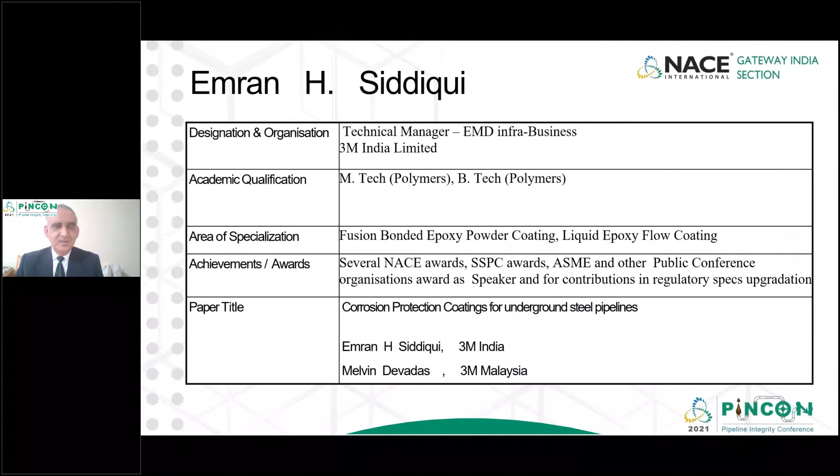Now, what is important about corrosion protection? The corrosion protection coating has been used for maybe the last 70, 80 years, and there have been lots of oil and gas pipelines which are still functioning, and the industry has been working on this. But there are changes now. There are new developments, improved technologies are coming into place, and the methods of application have improved. So we will be discussing the important part, the new changes and positive improvements in coating technology.

As part of this discussion, we will talk about the different types of coating technology, the application processes, what controls can be made and improved, and in what environment the pipelines have to be constructed and operated.

We will also discuss that in case there is an error in application or a dilution of discipline, how it impacts the long-term performance of the coating and the long-term service of the pipeline.

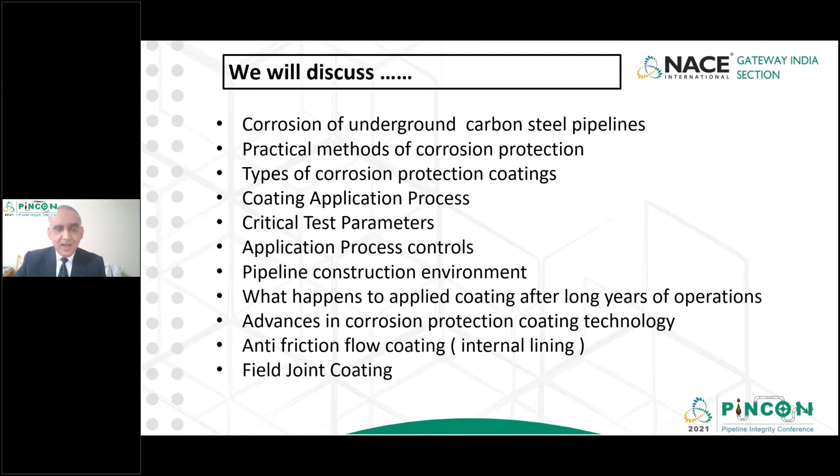So all of us know that fusion bond epoxy coating is the important part of corrosion protection technology for underground pipelines. This technology was invented about 60 years ago, and since then it has been in use.

So we will be discussing the quality assurance part of the application process. The company which invented the FBE has also played a good role in developing a good quality assurance system for the application process.

It also worked with regulatory industries like the Canadian Standard Association and International Standards Organization to have a comprehensive system of testing, qualification, sampling plan, method of evaluation, and the decision making process in terms of acceptance criteria. So we'll be talking about that.

The very important part of this coating is that we need to know how this application process impacts the long-term service life under varieties of service conditions. Other than line pipe coating, there are components of pipe construction which is field joint coating, though we'll be touching on that also.

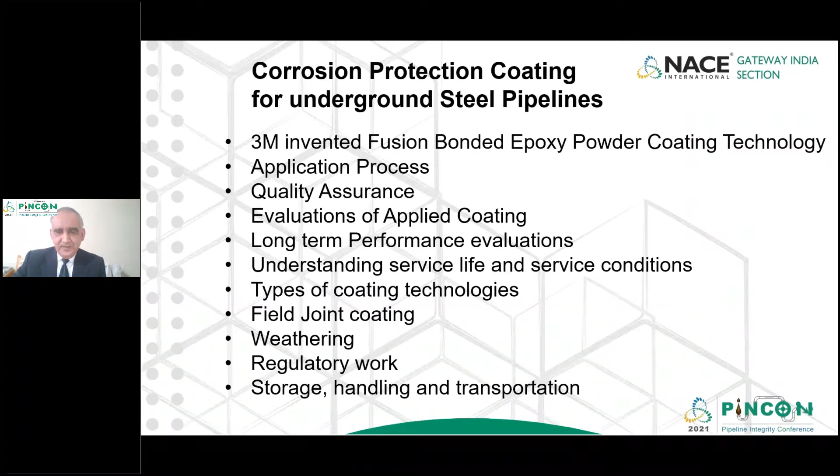Now, what is fusion bond epoxy coating? It's physically a powder which is largely based on epoxy resin, and it is created in a way that there are so many components in the physical FBE powder.

One of the main raw materials is a specially chosen epoxy resin in the solid form, and of course the manufacturers know the characteristics of the resin which has to be used. So it's not a general purpose resin, it's very specifically developed for this purpose.

The second most important composition is the catalyst part of it. It's again a chemical which actually reacts with the epoxy resin. The catalyst can be amine based, or different kinds of materials are used as catalyst, imidazole, etc.

Then there is a curing agent. Now, why do we need two items like catalyst and curing agent? Because during the application process, there is a requirement that the powder should form a gel within a certain period of time, a few seconds, at a certain temperature. So there is a component called catalyst which controls the gel time of the powder, and there is another chemical which is a curing agent, which actually helps to completely cross-link the epoxy resin.

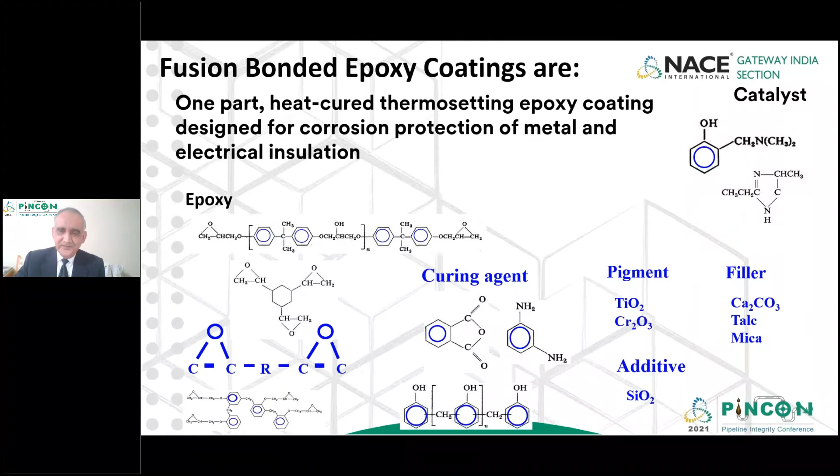When we come to Europe and Middle East, there is another trend here, that a three-layer polyethylene coating system is being applied. The three-layer polyethylene coating system was introduced after FBE was introduced. What was the reason for that? The fundamental thing is that pieces of pipe are coated in a factory, and then they are transported through a truck drive to the construction site.

During this truck drive, the pipes have a lot of bumpy rides, which causes the pipes to impact each other. And during handling, the pipes are taken through the powered crane.

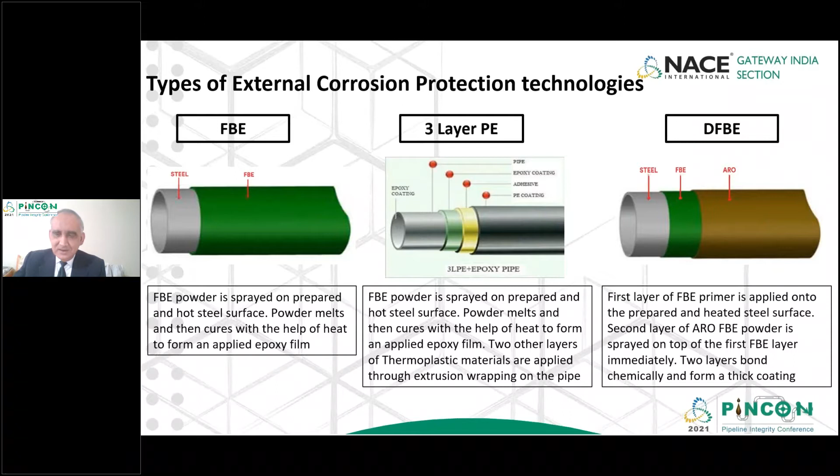Now, in order to apply any type of this coating material, an applicator needs a directional document which provides guidelines and helps the applicator stick to certain important points. That is a live document for the application process. This same document is with the applicator, the inspection agency, and the client, and it helps like a Bible to settle any dispute or ambiguity, or provide clarification on what to do in case deviations are noticed. So this is good practice.

What is needed is that in this documentation, any improvement in terms of how to improve the surface preparation, or how much improvement is needed in application speed or temperature, should all be mentioned in this document, which is called a contractual specification.

As a manufacturer or consultant to this industry, our team is continuously in contact with all stakeholders. We provide data and collect data through our network. There are several third-party research organizations continuously working on methodology improvement, so updated information is available to help improvise this document.

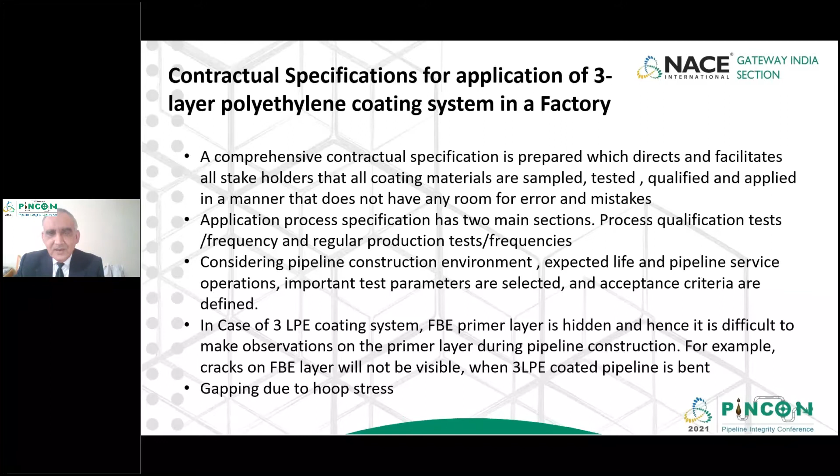Now, if we're talking of three-layer polyethylene coating, there are three most important parameters here. Why is it important? Because when these pipelines are constructed in the field, the pipeline has to be bent according to the topography or path of the line.

When it is three-layer coated, it's very difficult to find out what's happening with the FBE primer layer. So there is a new suggestion in the contractual spec that before we start the application process, we coat a few pipes only with single layer FBE and conduct additional tests to make sure the three-layer coated pipeline will always perform as expected. One of the most important parameters is the flexibility test for the single layer coated pipe.

Normally the ISO standard is referred to in most specifications, but in this case, ISO is a very easy specification to meet: 2 degrees per pipe diameter at 0 degrees Celsius. There is a need for a more stringent specification so there is assurance that this will not have any probability to crack or fail when the pipeline is constructed.

So our suggestion has been, with several companies, and some of them have adopted it, to make it 3 degrees per pipe diameter, tested at minus 30 degrees Celsius. This comes from a CSA specification. So there is already a regulatory spec available, and many companies have adopted it.

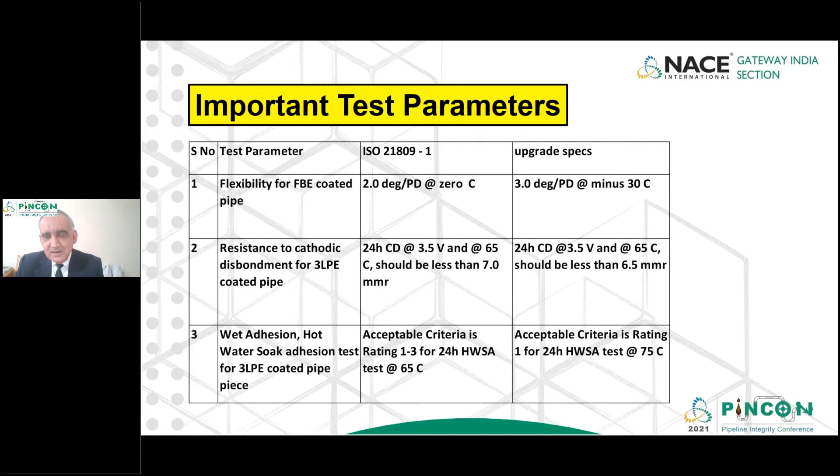So we generally test a 24-hour hot water soaking adhesion test at 65 degrees Celsius as per ISO. What we have suggested to improve it, many companies have taken reference from CSA, and now the new requirement is rating 1 as per CSA, with the hot water soak adhesion test done at 75 degrees Celsius. This is the immersion test. So if they take care of these parameters, all others will fall in place.

Now the question is, how do we ensure that every piece of pipe which is coated follows this? Because typically after procedure qualification test, it can take several weeks or months to complete the project, and applicators will run this coating process continuously for 3 shifts. So in order to ensure every pipe coated follows this, there are some guidelines.

First, select the FBE powder which has got a wider window, that it can take care of fluctuations in the conveyor speed or fluctuations in the pipe temperature. If the FBE powder doesn't have a wide window, and for any reason the temperature fluctuates, then the adhesion levels may vary. So that's very important.

Second, inspections for incoming pipe are also important, that the incoming pipe does not have any defect before the application process. Salt contamination has to be checked on a blast clean pipe, and it should be ensured that it is within the limit.

Otherwise, there is a recommendation to use a very high pressure water wash. Also, it should be cleaned using phosphoric acid so that all the salt gets combined with the acid, followed by a water wash. So the acid should also be removed. That is why there's a pressure requirement that at least 2000 psi of RO water is needed.

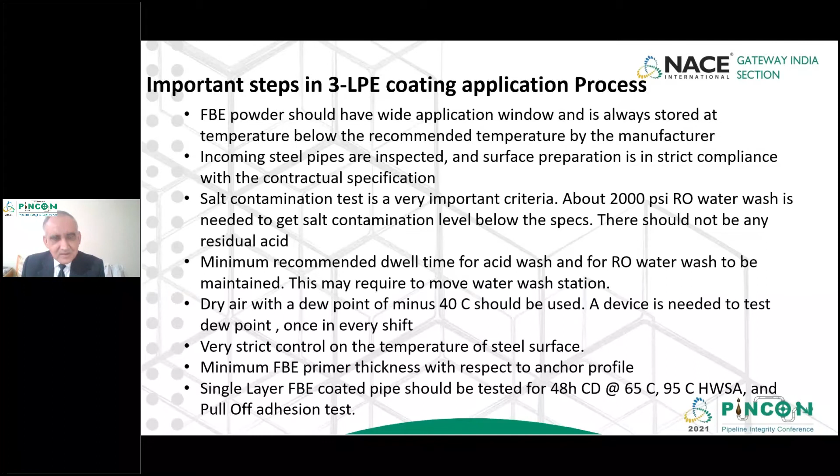Let's see how the flexibility test is done. We mentioned three parameters, and one of them is flexibility. As per the Canadian standard specification procedure, the FBE or DFBE coated pipe needs to be cut into panels of about 1 inch by 8 inches in size.

In the middle picture, you see a brown colored panel, which is actually a piece of pipe. Before it is bent, it is kept in a freezer at minus 30 degrees Celsius for at least 1 hour so that the temperature is stabilized. The panel is taken out, and a stopwatch is used to measure how much time it takes to bend.

There's a guideline on how quickly it has to be bent. The panel is placed in the bending machine against a mandrel, and the mandrel is designed for an angle of about 3 degrees per pipe diameter. The bending is done very quickly, and the details of speed and time are written in the specification.

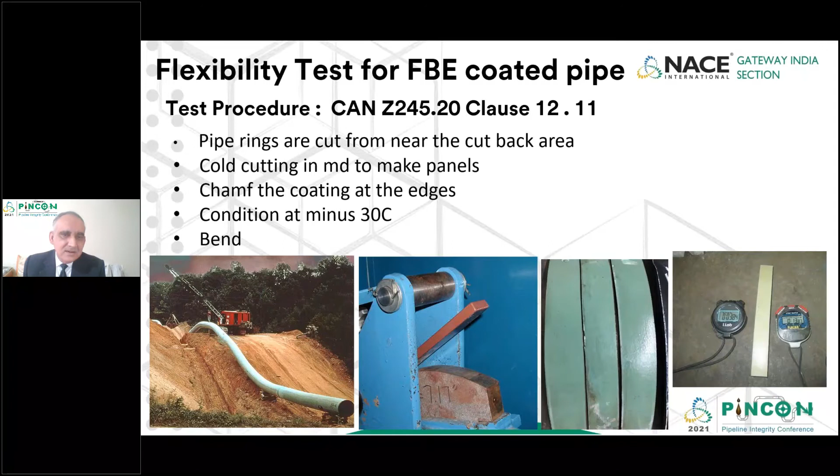After the panel is bent, it is kept on a table or platform, and for the next 60 minutes it is observed with a stopwatch to ensure it doesn't develop any cracks or pinholes. Then a small low voltage tester is run over the bent bars to check for discontinuity or holidays. That completes the flexibility test method.

The second parameter is resistance to cathodic disbondment, again a very important parameter for coating. In the picture, a piece of pipe is shown at the bottom, and a plastic or glass beaker is built on it using a sealant. There is an intentional holiday created, meaning a small incision or circle is intentionally cut using a knife.

The guideline says the holiday should be 3 millimeters in diameter. There is an electrolyte solution of 3% sodium chloride and water, and an electrode attached through the electrolyte, typically a calomel electrode. A 3.5 volt DC current is applied to the circuit, and the temperature of the assembly is kept at about 65 degrees Celsius, using either an oven or a sand bath with a heater.

This test has to continue for at least 48 hours. This is a very highly accelerated condition of corrosion compared to what happens in actual service conditions. After 48 hours, the beaker assembly is removed, and the panel is allowed to cool down to room temperature, and then a knife is used to remove the coating.

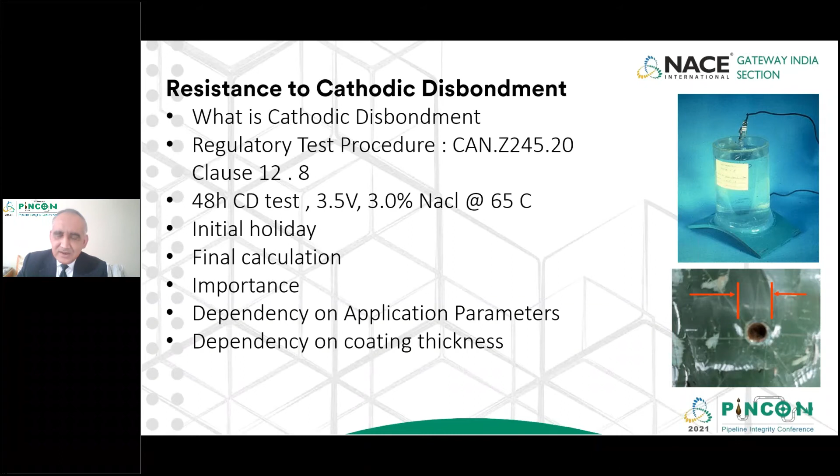Another third parameter is adhesion of the coating material. Because it's an epoxy, it bonds very high with the steel. It's called a structural adhesive.

There are two ways to test it. One is in the laboratory, shown in the brown picture A, which is the overlap shear strength test. If we do it that way, it will show more than 4000 psi, which is a measure of structural bonding. But shear adhesion cannot be done every day, since the panel has to be prepared, bonded, and cured. So it's like a one-time qualification testing.

What is more common, and can be done every day, is the pull-off adhesion test, shown in the green picture. The aluminum dolly is bonded onto the coated surface using a structural adhesive. After the adhesive is cured, equipment is used and the dolly is pulled. The value of pulling force can be measured either in psi or megapascal. Some equipment measures in psi, so anything above 4000 psi is good adhesion. Or if measured in megapascal, it should be at least 30 to 40 megapascal. That's a very, very high level of adhesion for an FBE.

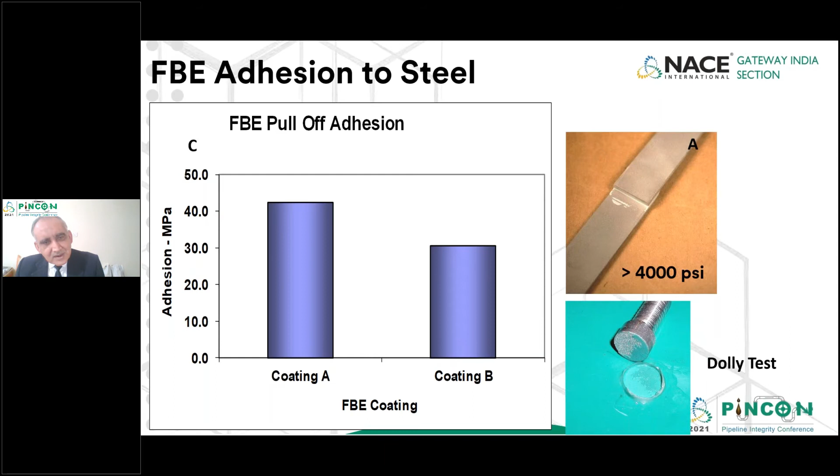So tender documents normally recommend that when a single layer pipe is coated, this pull-off adhesion test should be performed.

Now we are moving to a dual layer system. We discussed about 3 different options. In this diagram, the green color material is FBE primer for corrosion protection, and the outer layer is called abrasion resistant overcoat, or ARO FBE. Both are FBE. The outer layer material provides very high impact strength and high abrasion resistance.

It basically protects the FBE primer during handling and transportation, and this is a very rugged system. This combined coating system resists temperatures up to 110 degrees Celsius, so pipelines operating at say minus 30 to 100 degrees Celsius can utilize this technology.

It's very fast and easy to apply compared to 3-layer systems. This system can be applied with greater speed, so the pipeline project can complete on time. It's easy to handle, easy to inspect and repair coating defects. The total thickness required for corrosion protection in this case is only about 800 to 900 microns, compared to polyethylene which is 3 millimeters. So it consumes less quantity of coating material, making it more economical with higher performance.

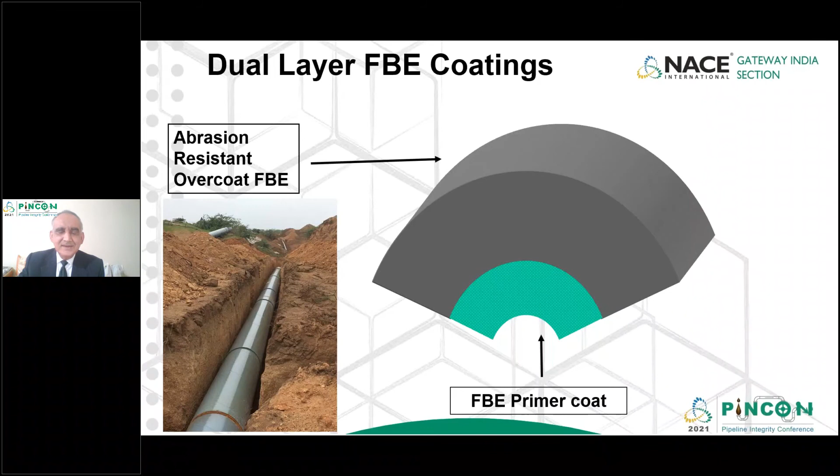In terms of application of dual layer, it's very simple. All of the applicators have got 2 booths. The first powder spray booth is for the primary layer, and the second booth, next to the first, is for ARO powder. So it's easy to apply and easy to recover the recycled powder.

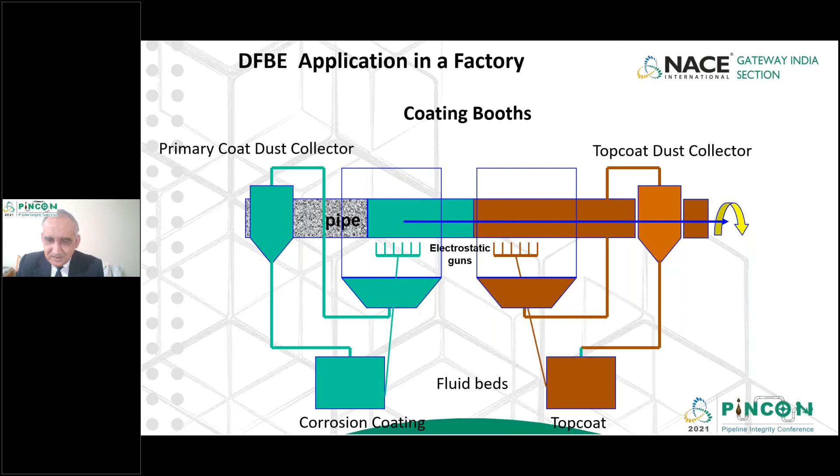There are so many tests, but one of the most important is the gouge test as per CSA. What is a gouge test? A piece of coated pipe is taken into the lab. About 50 kilogram weight is applied through a very hard burr, and the panel is pulled in a horizontal direction, so the hardened burr actually inscribes into the coating.

So what we did is we compared 2 panels: one is a 3-layer polyethylene coated panel, and the other is an ARO layer coated panel. The blue line is representative of the 3-layer polyethylene coated pipe piece, and the red line is representative of the ARO coated pipe piece.

Why we did this comparison is because in our country, especially in India, when a pipeline is being constructed, the outdoor temperature is typically about 30 to 40 degrees Celsius. So if we do the gouge test, which simulates backfill—earth material taken out from the trenches or put back after the pipeline is laid—this backfill has a lot of rocks and hardened pieces of earth which impact the pipeline. That's something like gouging the coating.

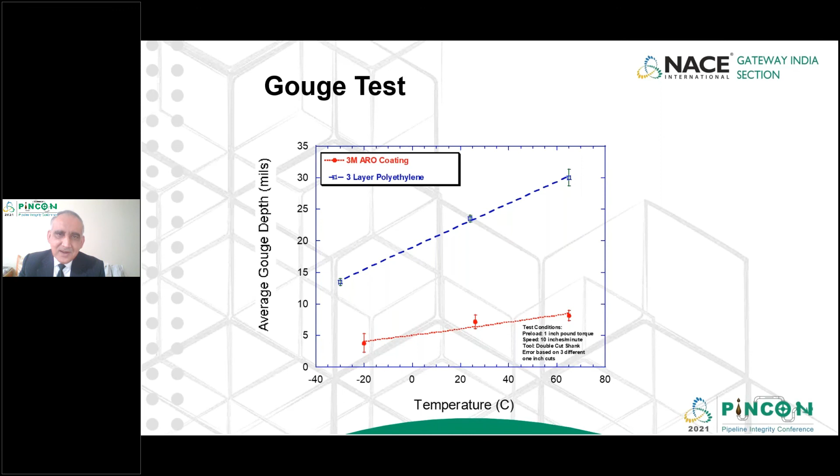The dual layer is also tested for weathering resistance by a company called Atlas, known for natural weathering. They evaluated fields for 12 months of natural weathering, that even if the pipes are lying on the dump site and exposed to natural weathering, even at sites like Chennai which receive very high UV light, the coating remains unaltered.

It does not deteriorate. After 12 months of weathering, these panels were tested again for the original specification like adhesion, flexibility, and impact. The only observation was that the glossiness of the coated panels faded out a little bit. There is a color fading effect after 12 months exposure, but there was no deterioration in performance.

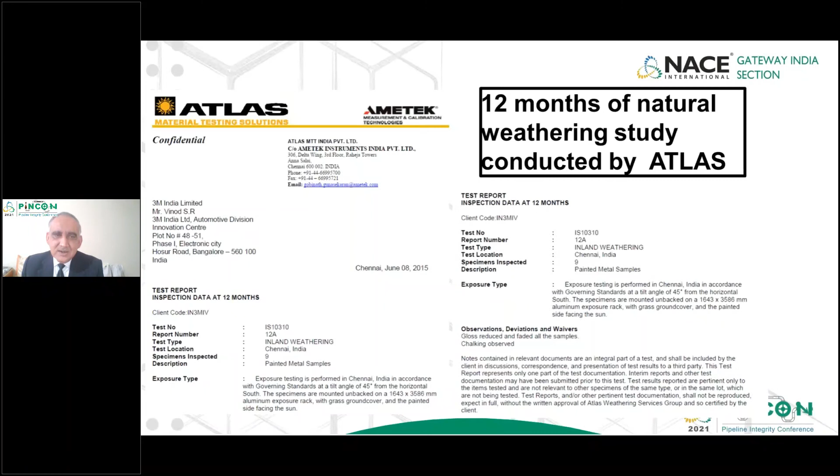Now, moving on from line pipe coating - when a piece of pipe is coated in a factory, it's called line pipe, a standard 12 meter length. But these pieces of pipe have to move to the site for construction of a longer pipeline, and then they are welded together. It's called girth weld.

So the girth weld area, also called field joint, also needs to be coated with a corrosion protection coating, and the material should exhibit the same level of corrosion protection performance which line pipe FBE or DFBE coating does. So each manufacturer has a compatible high build liquid epoxy coating which can be applied easily in the field and gives similar performance.

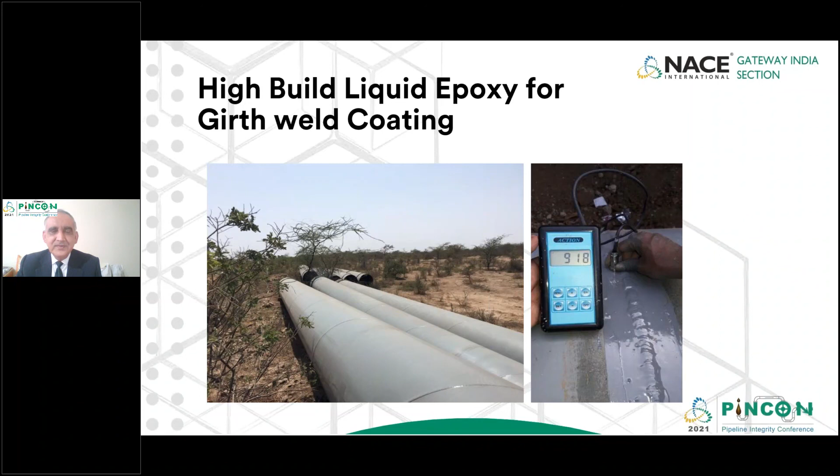Another topic, especially for gas pipelines, is internal coating which makes the surface smooth and helps in pumping the gas. Typically these are governed by two regulatory specifications, American Petroleum Institute and ISO.

Typically a very thin 80-100 micron coating thickness is applied, and the purpose of this coating is to provide a smoother surface so that there is substantial saving in the pumping of gas. It's like a given and mandatory for all gas pipelines.

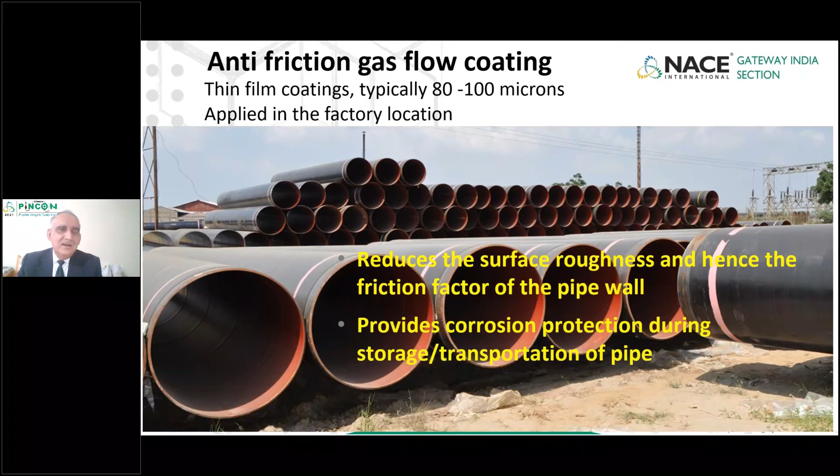There is one company in South America called Gas Atacama. What they did is take two pipelines of identical diameter and wall thickness for hydrocarbon gas, like natural gas pipelines.

They applied different kinds of available flow coating materials, some with very high volume solid and some with normal moderate volume solid. They did the calculation and came up with the criteria that the higher volume solid product, which gives a smoother surface - measured in terms of RZ value - gives a better advantage in saving on pumping cost.

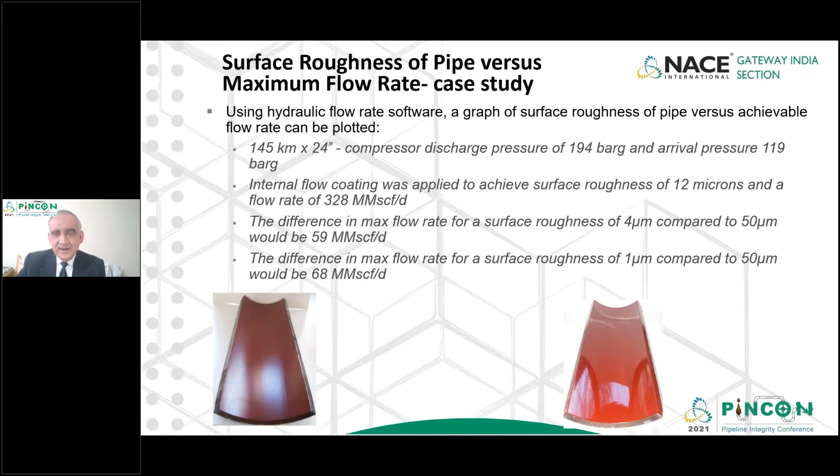Now here are some pictures where a new technology is being used in terms of flow coating. It's a solvent-free product, 100% volume solid. No solvent is used. This product gives a very smooth surface, very safe, no fire hazard, no discomfort to the applicator because there are no fumes of hydrocarbon solvent.

The product gets applied very smoothly and the glossiness is high. The product cures very fast. Typically, available products in the market are like 50% volume solid product, which take 5 to 7 days to cure. This product can cure within 5 to 6 hours.

So the advantage for the applicator is that once the pipe is coated, within 5 to 6 hours the pipe product is cured, can be inspected, certified, and dispatched. So they don't occupy a lot of space in their yard, and they can increase the speed of production, so their output will be very high - high productivity. They can dispatch the pipe within 6 hours, clear the space, and coat new pipes.

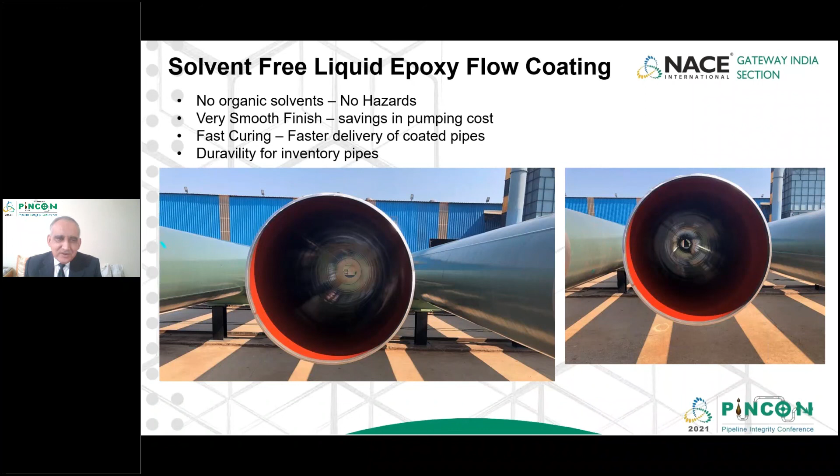So applicators are very happy with this, and it's not only about applicator convenience, it's also high performance, because the RZ value with these kinds of coating is less than 1 micron, which is very smooth. For normal solvented product, we get like 8 to 10 microns. With solvent-free product, we are getting 0.5 microns RZ value. So it's really smooth and a lot of benefit in terms of operating the pipeline.

This information came from this company, Gas Atacama, and they actually published a paper on this, on what are the benefits of using solvent-free product.